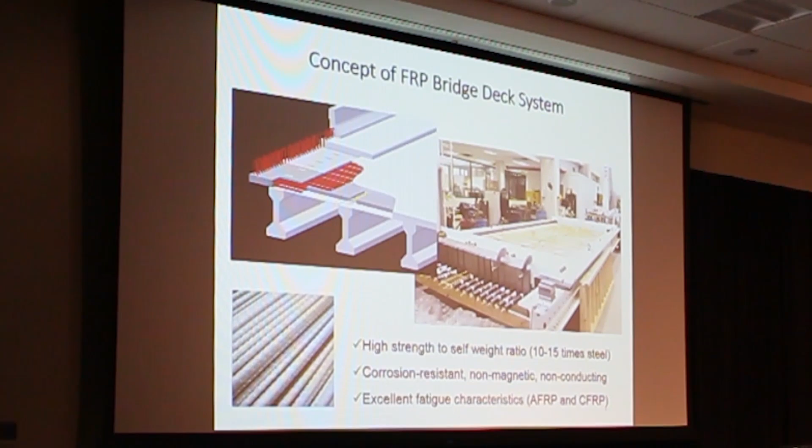So my whole idea was nothing novel, but let's just use these composite bars on the inside of a bridge deck, lay them like a lattice structure or a matrix on top of each other, pull on some of them so that they're really strong in their optimal capacity and tension, then pour the concrete in and see how these things perform. There are some challenges. With any good system, we have to look critically at how the whole system works.

But these bars themselves have a high strength to self-weight ratio, about 10 to 15 times that of steel. Like I said, they're corrosion resistant, non-magnetic, and non-conducting. It's a no-brainer, is what I thought. They also have excellent fatigue characteristics. In other words, if you cycle them back and forth, they can go for longer periods of time, which is ideal for the bridge environment.

So the whole concept is, we have these bridge decks, we put them together like Legos, we connect them with concrete to tie it all together. But the way in which we have to use this system, in the long ways on the bridge deck, we actually pull the bars in tension. So where we have there the dead end, that's where we actually lock in the bars on that one end and pull from the other end, which is called the live end, to stretch out these bars.

You can think of it like a rubber band. We stretch it really, really taut. And then we pour the concrete in to basically seal it all together to make it this one great system.

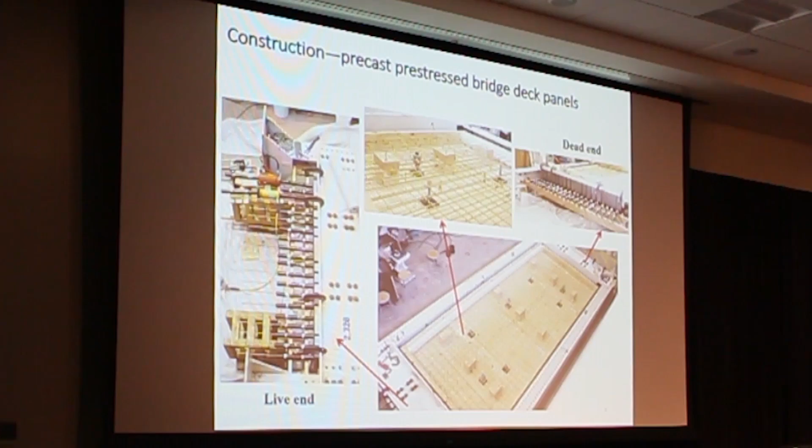Another advantage, which the Federal Highway is also moving towards, is what we call prefabricated bridge elements and systems. In other words, these panels are perfect in the sense that we can make them off-site in a lab or a manufacturing plant or a precast plant, and then put them on a truck, take them to the bridge site, and then lay them in like Legos and then connect it all with the concrete. So the idea is that it would take less time for construction and also be very efficient.

So with these bars, we also learned that there are some thermoplastic properties that make these bars great. So one of the challenges with having these bars or composites, we know they're flexible, but will we be able to bend them like we can steel so that we can make hooks? Well, yes, you can. We can heat it up. We can hit on it with a slight loss of the cross-sectional area, and then we can bend it.

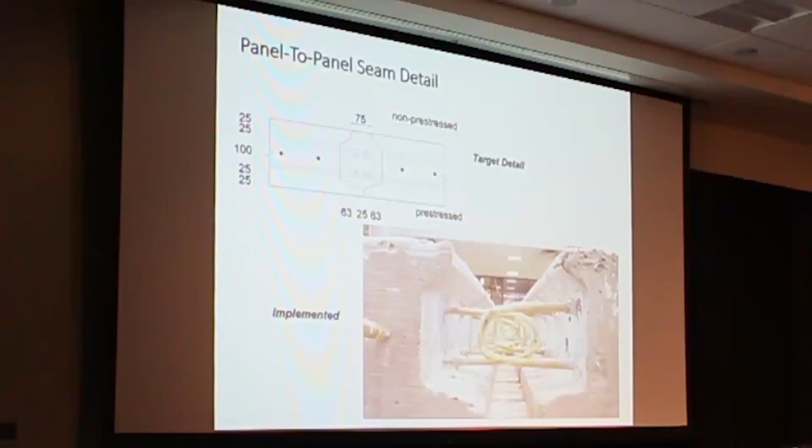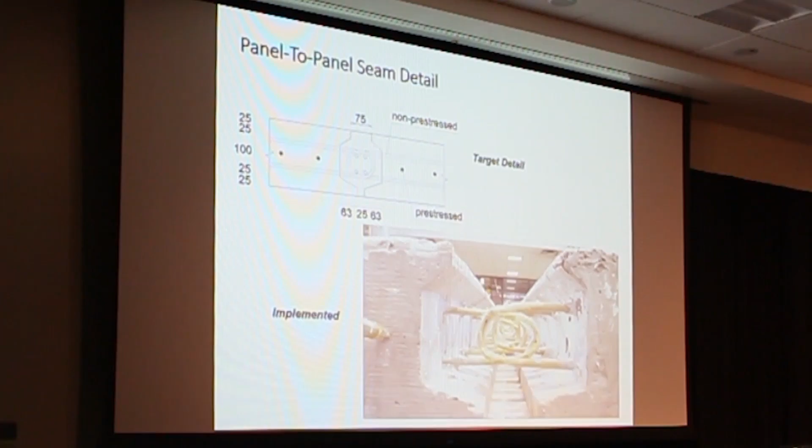So what advantage does this have? Well, it's a significant advantage in that we can have these bars also serve as hooks when we put the two panels together and need to connect it with the concrete in between. So right here you're seeing a picture on the inside view of these bars that are these stirrups or hooks that we need to connect these bridge decks together and tie them together with either a grout or a high-performance concrete. So the question becomes, when we build this system, how will it work?

Well, that's what we did. Through the research that I got through NSF, we were able to test this bridge deck system. So it's about 10 feet by 12 feet, a nice sized bridge deck, where you can see the yellow bars in the long direction are sticking out, and those are the ones that were pulled really, really strong. The other ones perpendicular to it were laid to give that lattice structure.

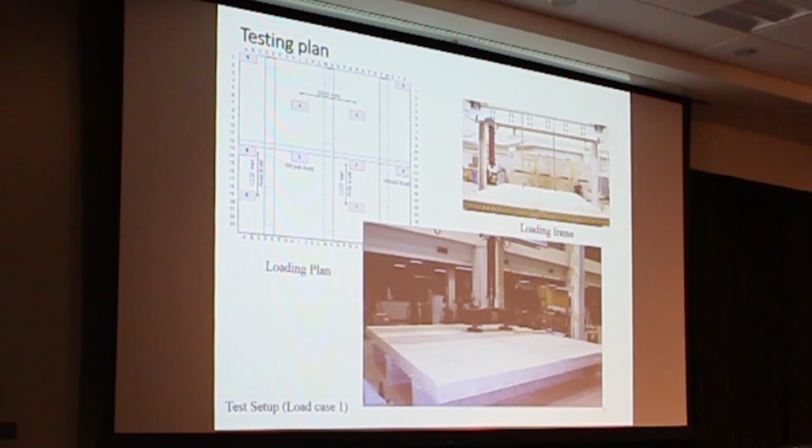So in doing so, we actually loaded down on the bridge deck, just how we would mimic the loads from a truck on a bridge, where we looked at several different cases. I mainly focused on load case 1, where we have 2 wheels or truck load wheels behind each other, and also load case 5, which is on the outer edge or what we're considering the overhang. In other words, what that load simulates is if you have a barrier on a concrete bridge, and then you have impact from a truck or something, what's that overturning moment or that force that needs to be resisted?

So we tested these. We had our control specimen that was made out of steel embedded in the concrete, as well as the bridge deck system, which you saw, which actually had the fiber bars that were pre-stressed, or just pulled like a rubber band, as well as the other bars going perpendicular to that.

So the solid line shows the aramid fiber reinforced polymer specimen, or the composite specimen, and then the control specimen is the one that's the dotted line. We see that if we were to look at just load in the vertical axis versus displacement on the horizontal axis, that the composite AFRP specimen actually took larger loads. It was quite strong, quite durable. We were very pleased with that. And that was for load case 1.

If we had the loads on the inside of the bridge, or the top far right picture, where you can actually see that not only were the stresses and the loads transferred nicely, but it took a larger load. That's a win-win in my book. We took a step further and looked at the case where we actually have load case 5 showing here, where we have the control specimen as the dotted line, and then the solid black line as the composite specimen.

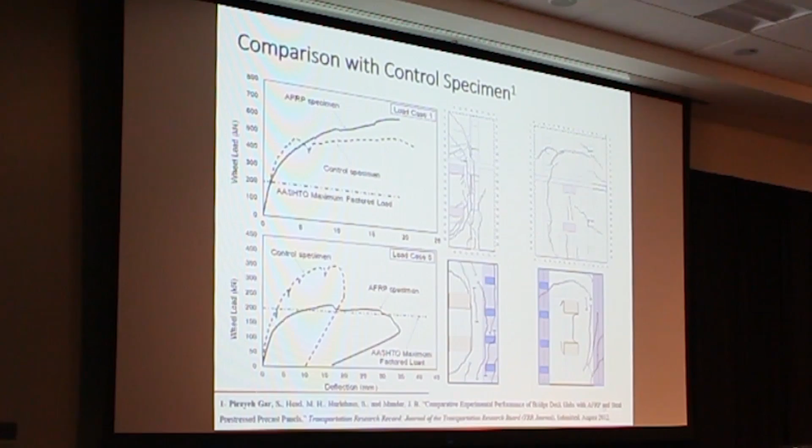So this is the worst case scenario, that if you were to have a truck or something that go off the edge, how much resistance would you get by the system? We see that the AFRP specimen, the fiber reinforced polymer composites, didn't do too badly. We see this, because the bars are quite flexible, this softening system where it still exceeds that minimum threshold for the load of 200 kilonewtons. So we had successful results with the bridge deck.

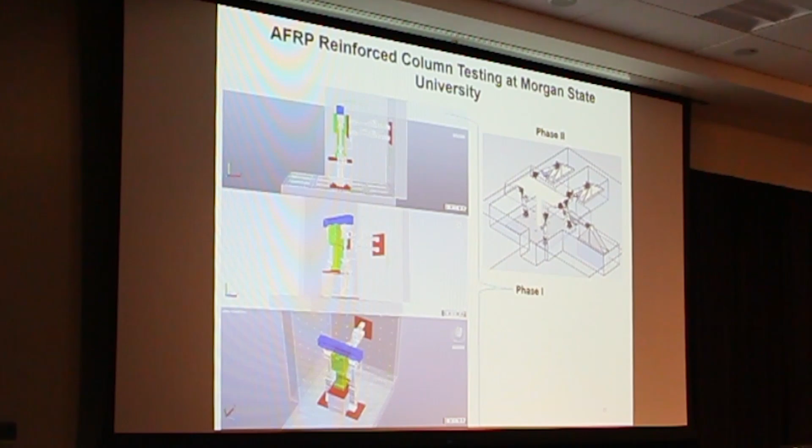And like I asked earlier, when I was thinking, how can we do this better? I extended it from bridge decks to also working on, now let's put these AFRP bars into a column to kind of go with this whole notion of this semi-metalless bridge system, so we can address this major issue of corrosion. So at Morgan State University, I've had several students and doctoral students working on this work, where we've taken it a step further, that innovation piece, where we have these bars that are addressing the issue of corrosion.

Check, got that. But we also know that in several environments, these columns must also take some type of lateral loads, or maybe loads induced by earthquakes, which is a significant issue. We actually know that 2 of the largest earthquakes that happen in the United States happened in 1811 and 1812 in New Madrid, Missouri, right? That's not on the West Coast. The second one in 1886 in Charleston, South Carolina. We have different types of earthquakes on the East Coast.

So while we address also this issue of corrosion, I thought let's also take it a step further in how we can build columns that are resistant to also absorb energy and can rock, but at very low levels, but still also be resistant. So that's what we're doing at Morgan State University. We're innovating. We're engineering systems to make them better and more sustainable to help America's infrastructure. That's the first phase. The second phase is that we're going to shake it up a little bit.

We have a shake table that allows us to simulate earthquakes. The table is about 9 feet by 9 feet. We can mathematically input equations into the driving system and make this thing shake as if it were like a magnitude 8 or 9 earthquake at Morgan State University. So we're really excited to expand this research a step further to look at the dynamic loads so that we can put this all together and model it.

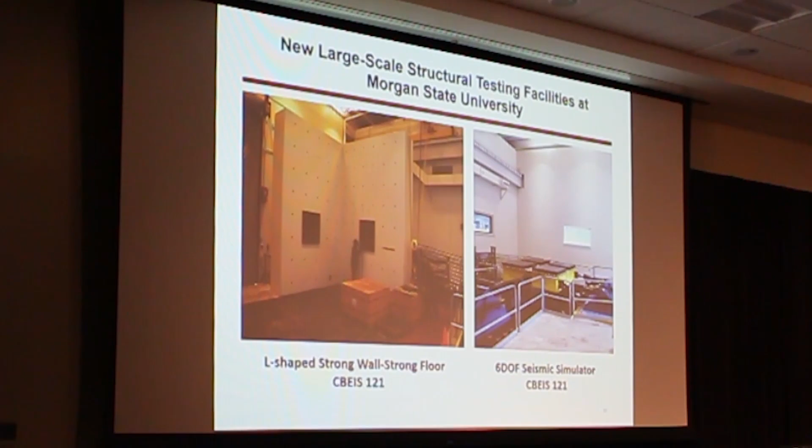So this is a picture of what the physical lab looks like in real time, with our strong floor and strong wall, for which we'll push and pull to simulate that softer rocking for that column. And then in the phase 2, we're going to put it on the table and shake it to also see its performance. So the question becomes, how do we really move forward?

I had this idea to be innovative and to really try to engineer a more sustainable solution. But the fact of the matter is, it takes time. And it takes a paradigm shift, especially with the construction industry, to accept these different practices and say, yes, this is something that's more sustainable. Because we all can agree, I'm sure, that if we build something, use your taxpayer money to put salt on it, then have to build it back up, just doesn't make sense. But we know we have a long way to go.

But the hope is that as we move forward, that we'll address these issues and also look at issues of asset management. Not only as we inspect the bridges and figuring out which bridge needs more help, but also to prioritize, well, which one needs more help first, so we don't see bridge collapses like we've seen in the past, where significant lives were lost.

Thirdly, we also need to work on converting research to practice, of having more implementation projects, where we've had full-scale projects in the laboratory, but also having more field demonstrations, which would also help to move this forward, as well as policy.

So with that, I thank you, and I'm glad to have shared my experience on how we've engineered better bridges. Thank you.